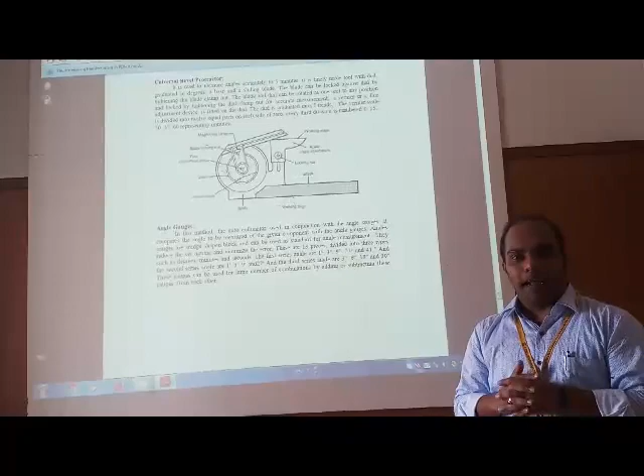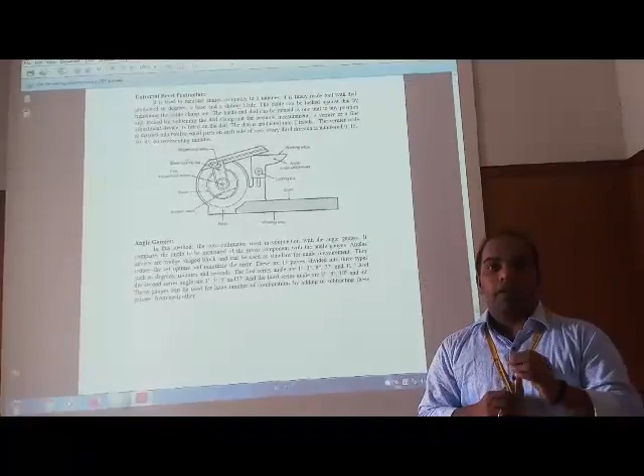In the last lecture series, we have seen videos regarding measurements using mechanical comparators, electrical comparators, as well as angular measurement using sine bar. Today we are going to do more advanced measurement using some equipment. Let us see one by one.

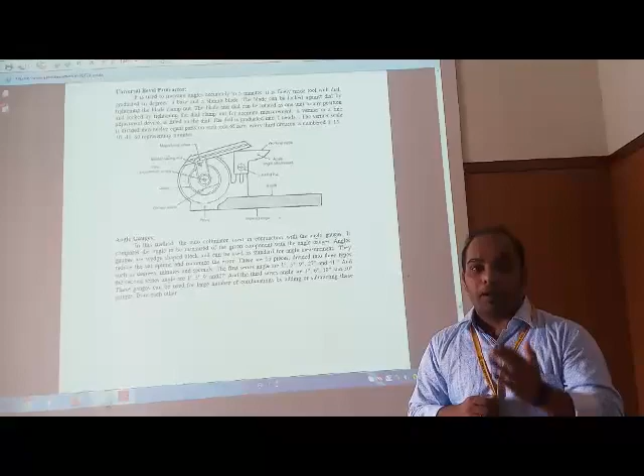The first instrument we are going to discuss is the universal bevel protractor. It has received this name because it has applications over the universe. It is used to measure angles accurately to 5 minutes. Keep in mind that minute is used in measurement as degree, minute and second.

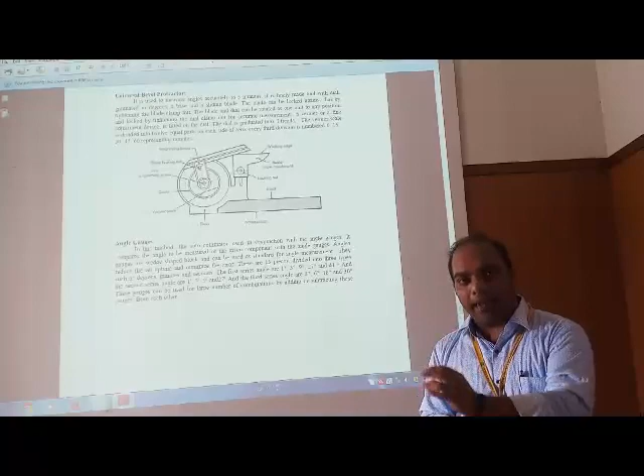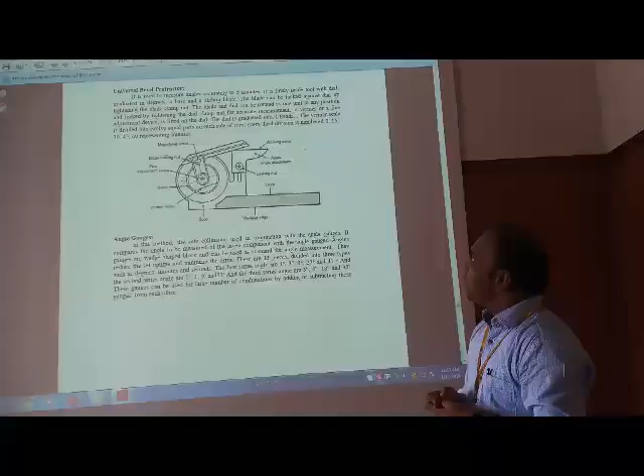It is a finely made tool with dial graduated in degree, a base and a sliding blade. The blade can be locked against the dial by tightening the blade clamp nut. The blade and dial can be rotated as one unit to any position and locked by tightening the dial clamp nut for accurate measurement. A vernier or fine adjustment device is fitted on the dial.

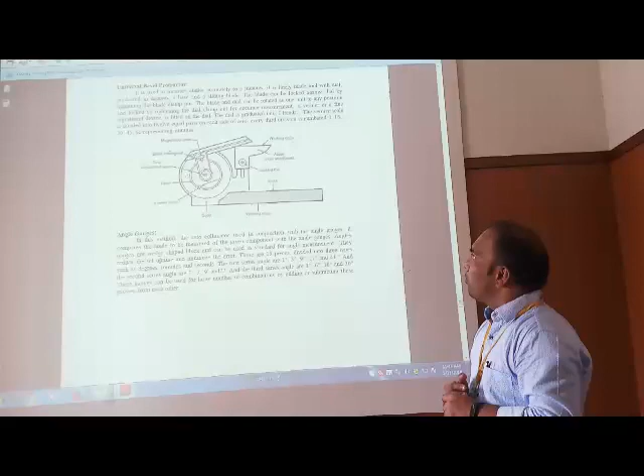The dial is graduated into degrees. The vernier scale is divided into 12 equal parts on each side of 0. Every third division is numbered 0, 15, 30, 45, 60 respectively, representing minutes. Let us see the diagram very clearly.

The working edge is on the bottom. The main body shows the connection. The vernier scale has been attached to the scale. The fine adjustment screw provides tuning of the instrument. The blade has a locking nut.

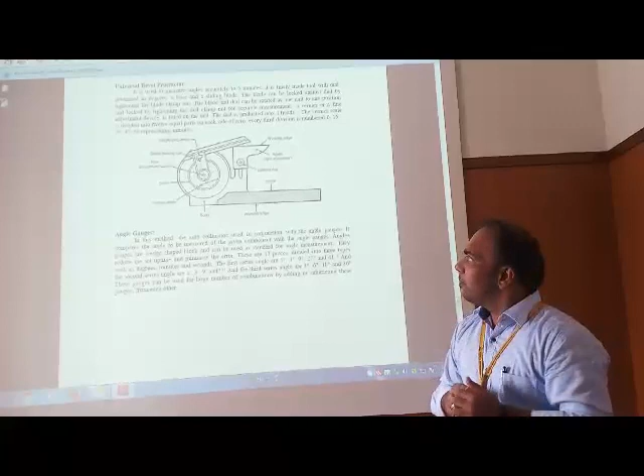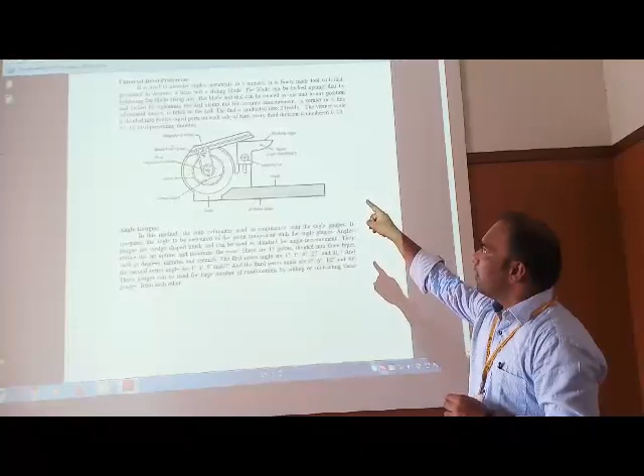The magnifying lens, as we have seen in the comparator segment, comes from the optical comparator division, but it magnifies the values, therefore reducing parallax errors. The working edge is aligned with the acute angle attachment. Also, the angular attachment is given with a nut, and the stock has been provided here. So this is, in general, the universal bevel protractor.

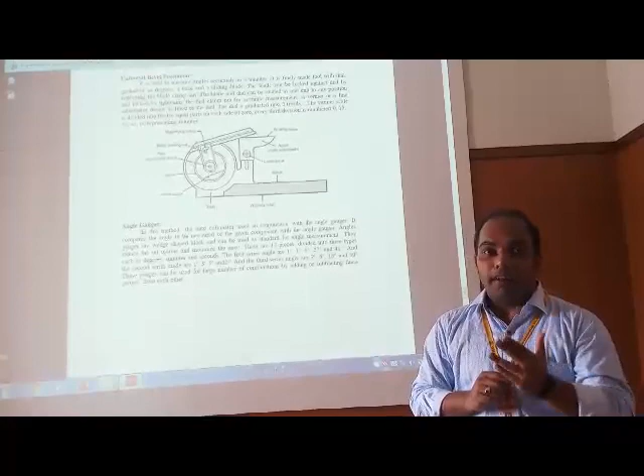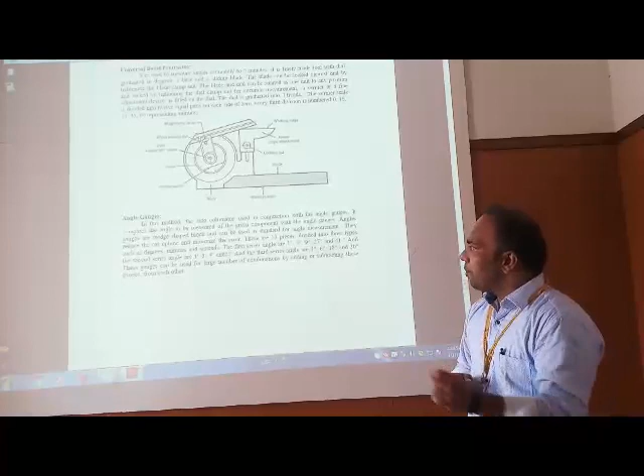Let us see another instrument in this segment, that is angle gauges. In this method, the autocollimator is used in conjunction with angle gauges. It compares the angle to be measured of a given component with angle gauges having standard angles. Angle gauges are wedge-shaped blocks and can be used as a standard for angle measurement. They reduce setup time and minimize error.

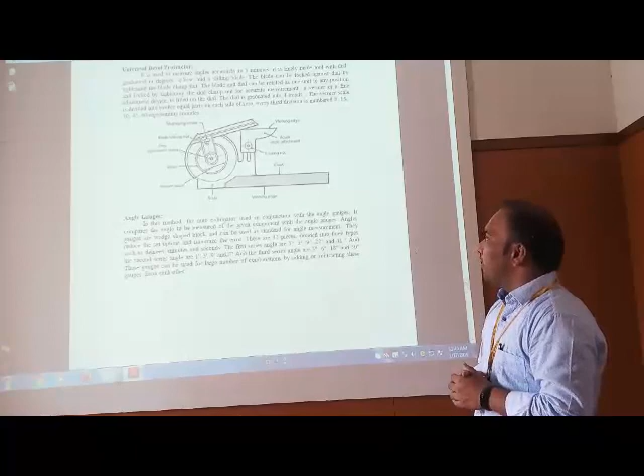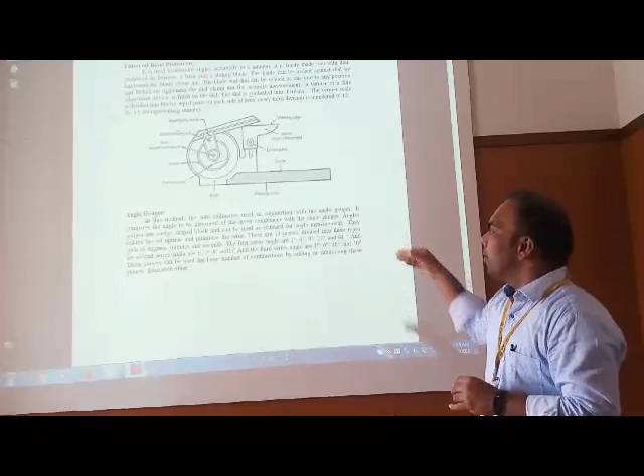These are 13 pieces divided into 3 types: degree, minute and second. The first series angles are 1 degree, 3 degree, 9 degree, 27 degree and 41 degree, and the second series angles are 1, 3, 9, 27 but in minutes. The third series angles are 3 second, 6 second, 18 second and 30 seconds. These gauges can be used for a large number of combinations by adding or subtracting different gauges.

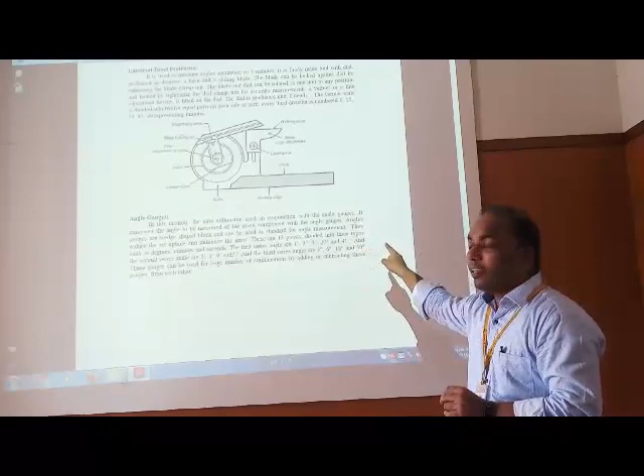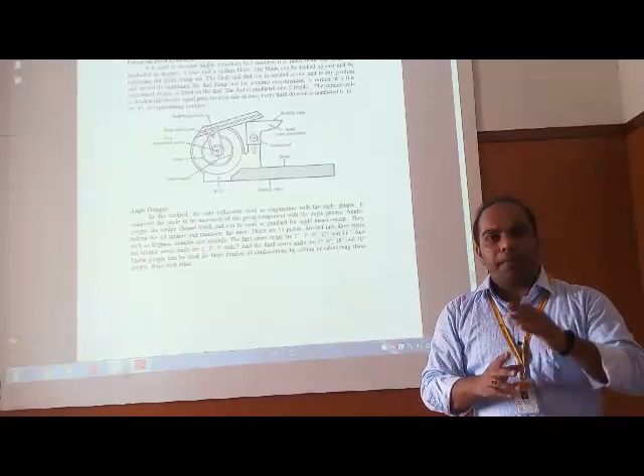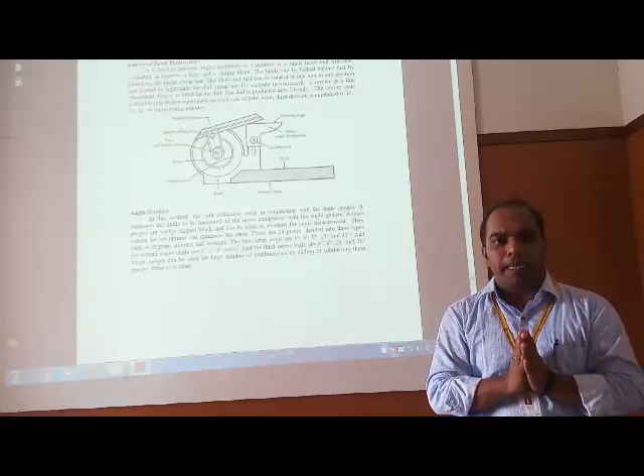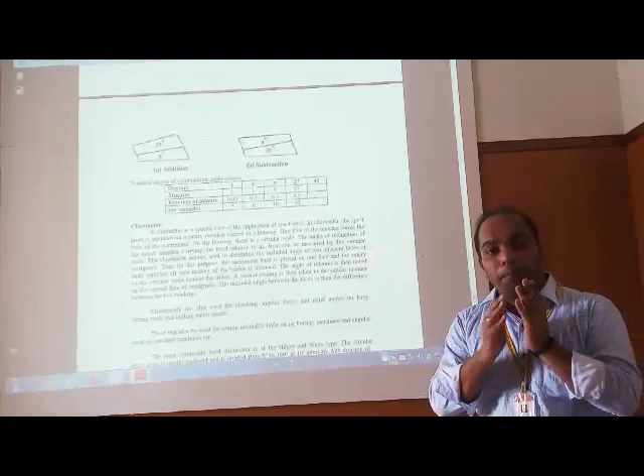As we have talked about how to form angle combinations, shown in the diagram, subtraction has been shown where 27 degree and 9 degree are in a reduction, meaning the angle included was 18 degree. In the first diagram, 27 degree plus 9 degree combine to an angle of 36 degree.

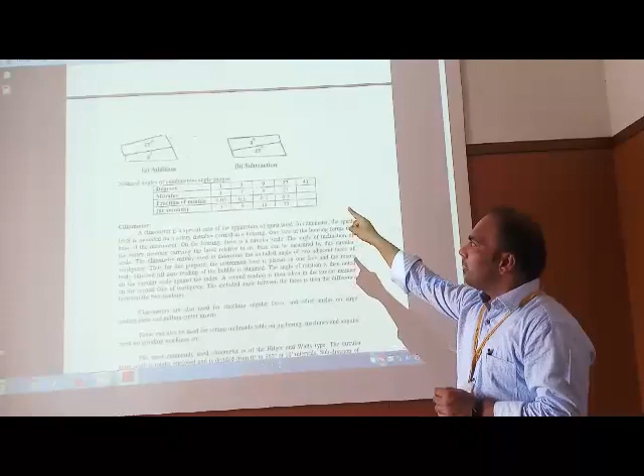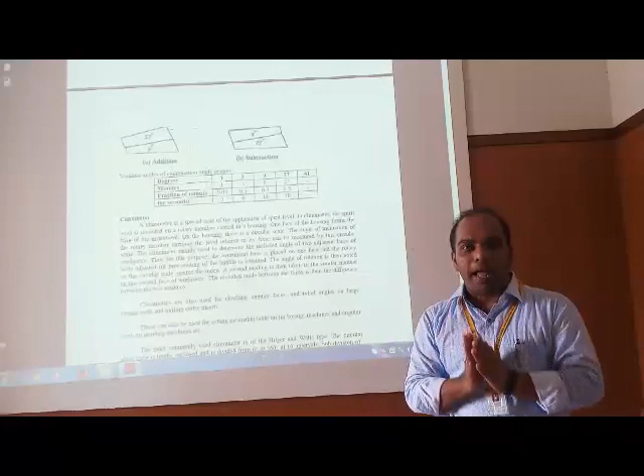Nominal angle combinations that can be obtained can be seen in the table here: degree 1, 3, 9, 27, 41; minutes 1, 3, 9, 27; fraction of minutes, or converted seconds, are 0.05, 0.1, 0.3, 0.5. So by adding different combinations in a crisscross manner, we can form different angular combinations.

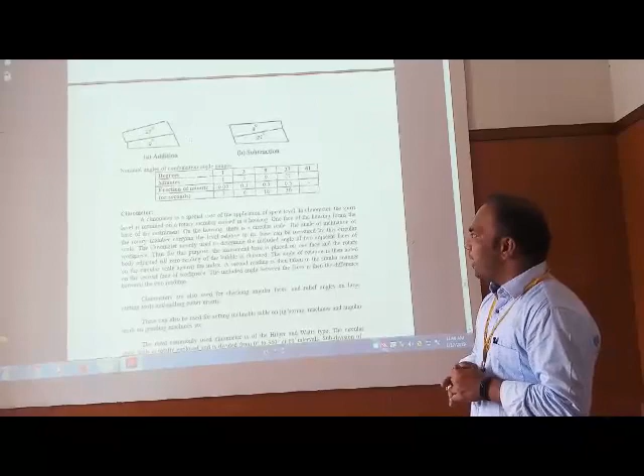Moving to the next very interesting instrument in the angular measurement segment, that is the clinometer. A clinometer is a special case of application of the spirit level. In a clinometer, the spirit level is mounted on a rotary member carried in a housing. One face of the housing forms the base of the instrument. On the housing there is a circular scale. The angle of inclination of the rotary member carrying the level, relative to its base, can be measured by this circular scale.

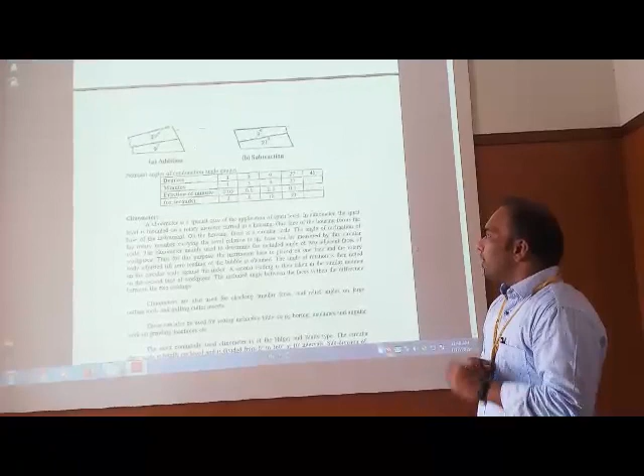Of course, all these things we are going to see in a diagram. For this purpose, the instrument base is placed, and a second reading is then taken in a similar manner on the second face of the workpiece. The included angle between the faces is then the difference of the two readings.

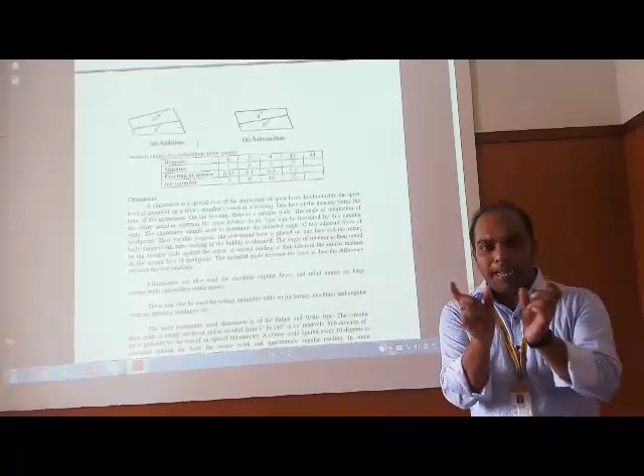Clinometers are also used for checking angular faces and relief angles on large cutting tools and milling cutter inserts. Milling cutter inserts are placed between arbors, giving angle to the milling tool. This can be used for setting inclinable tables on jig boring, as discussed last semester in the module on design of jigs and fixtures, machines, and angular work on grinding machines.

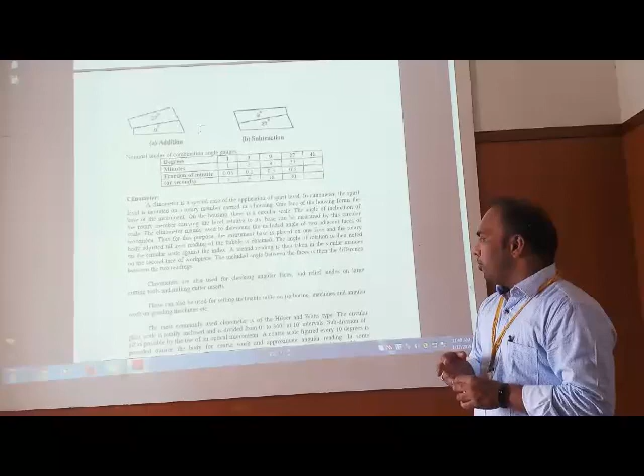The most commonly used clinometer is of the Hilger and Watts type. It is divided into 0 to 360 degrees at 10 minute intervals. Subdivision of 10 minutes is possible by use of an optical micrometer.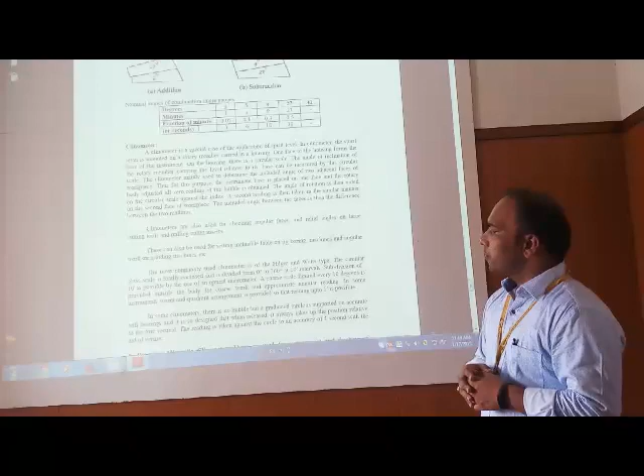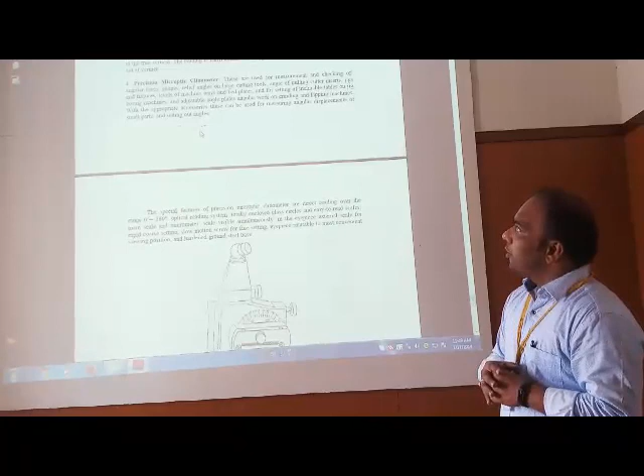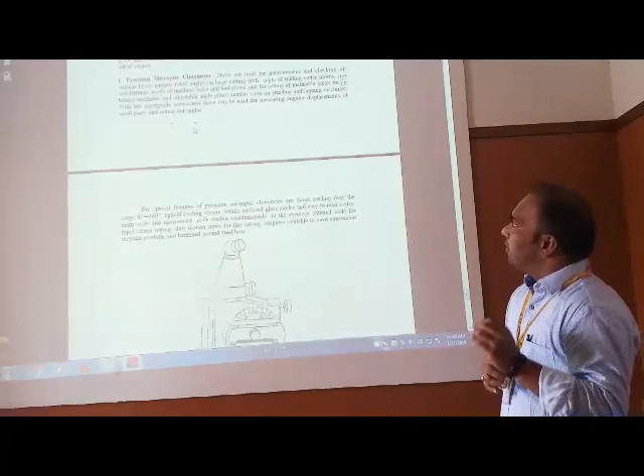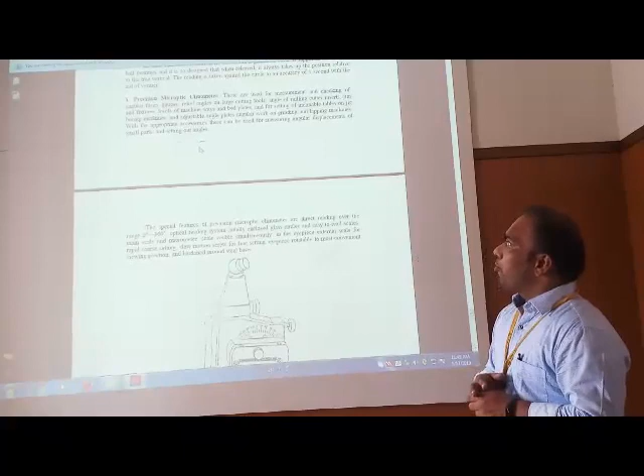Now, the precision microptic clinometer. These are used for measurement and checking of angular faces, gauges, relief angles on large cutting tools, angles of milling cutter inserts, jigs and fixtures, level of machine ways and bed plates, and for setting up inclinable tables on jig boring machines. With appropriate accessories, these can be used for measuring angular displacements of small parts and setting out of angles.

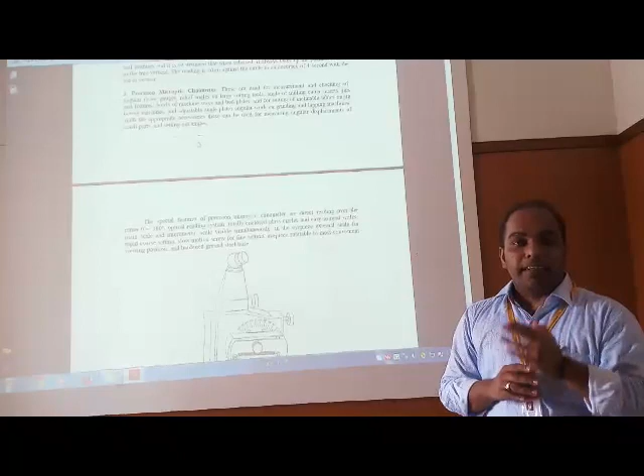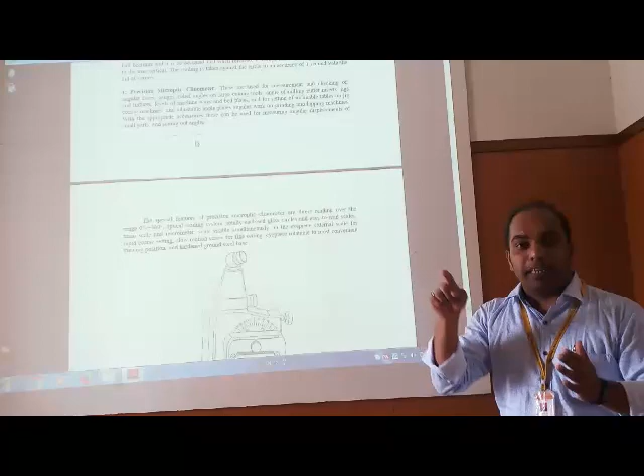If we think about it, these clinometers provide us the smallest possible angles to largest possible angles. Already in the last angular measurement, we have seen that 360 degrees is divided into 10 subintervals, meaning every part covers approximately 36 degrees.

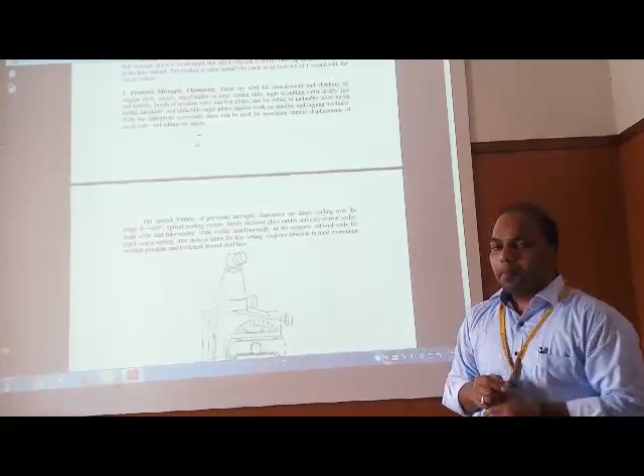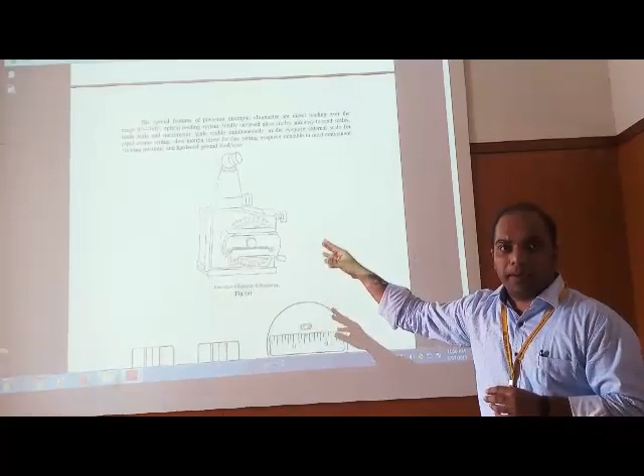The special features of the precision microptic clinometer: you can see the wonderful instrument in the diagram very clearly. As the diagram explains, the scale is divided into 10 interval parts of 36 degrees each. Therefore, 36 into 10 gives you 360 degrees in all.

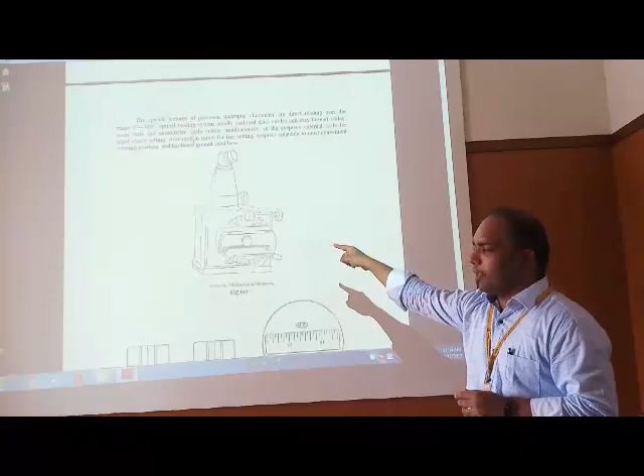There is an eyepiece for looking into that. On the right corner, the locking nuts have been provided. Of course, a slot is provided for any minor adjustment.

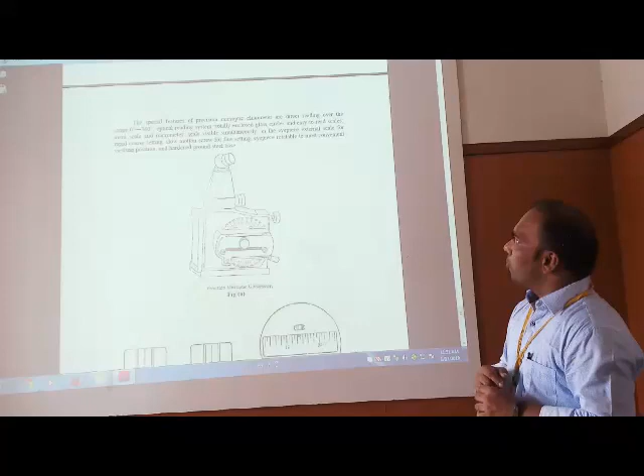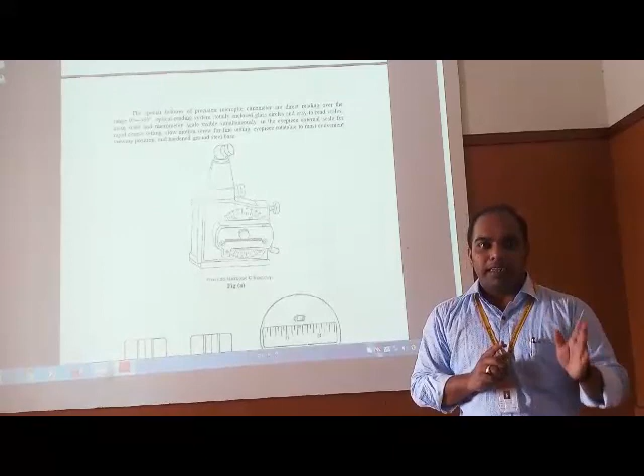The special features of this clinometer are direct reading over the range of 0 to 360 degrees, an optical reading system totally enclosed in glass circles, and easy to read scales. This means we can minimize the parallax error which generally occurs due to uneven looking into the scale.

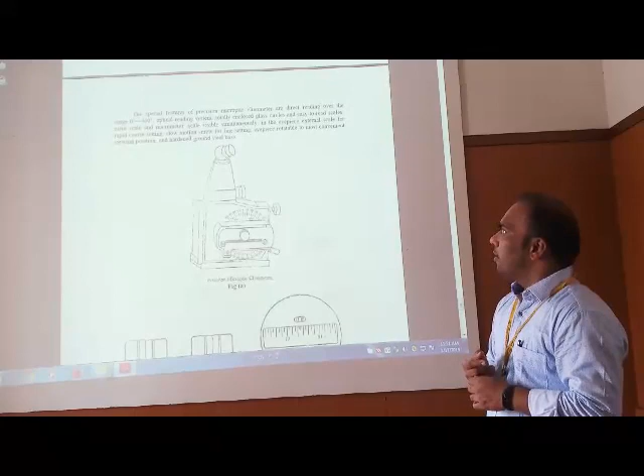The main scale and micrometer scale are visible simultaneously in the eyepiece. External scale for rapid coarse setting, slow motion screw for fine setting, eyepiece rotatable to the most convenient viewing position, and a hardened ground steel base are some of the added features of this wonderful clinometer.

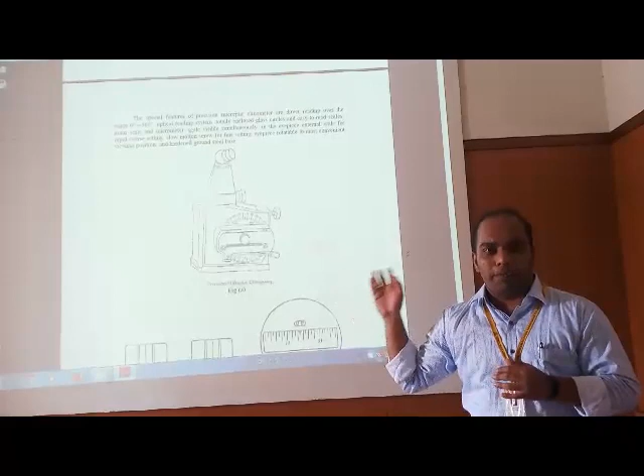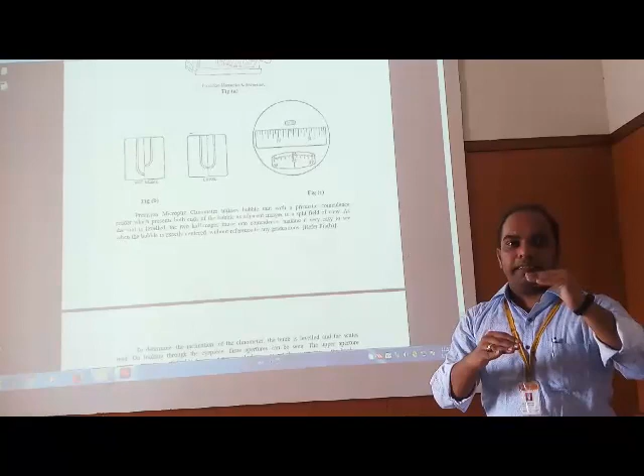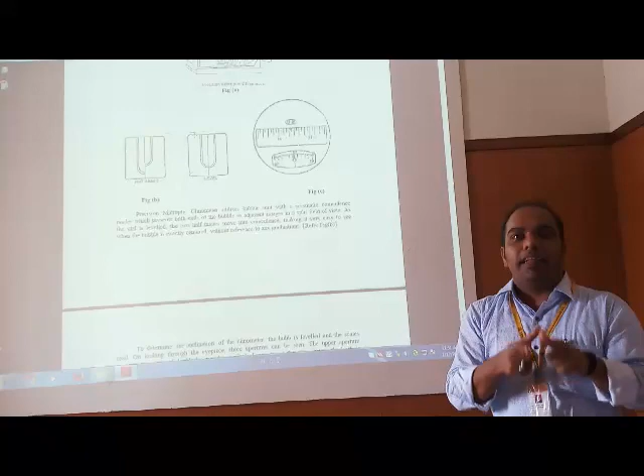We can check out the levels obtained in the two surfaces, that is, the surface compared and the actual workpiece. First, the surfaces are not matching, that is, it is not level. Second, it is perfectly coinciding, meaning the level has been achieved, and it can be visible on the master scale.

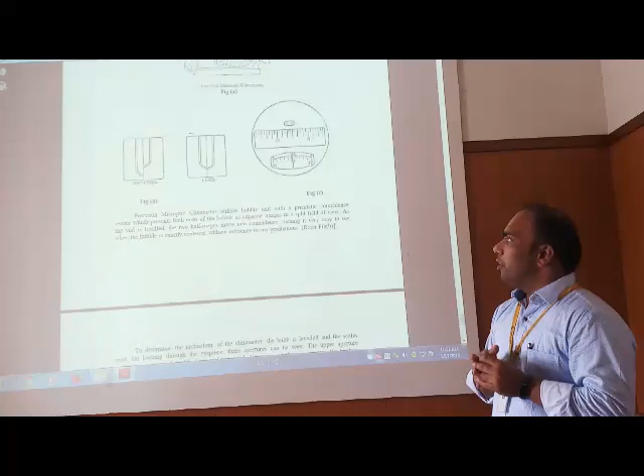The precision micro-optic clinometer utilizes a bubble unit with a prismatic coincidence mirror which presents both ends of the bubble as adjacent images. As the vial is leveled, the two half edges move into coincidence, making it very easy to see when the bubble is exactly centered without reference to any graduations.

Now, the summary of the clinometer. Without wasting much time, we will look at the summary.

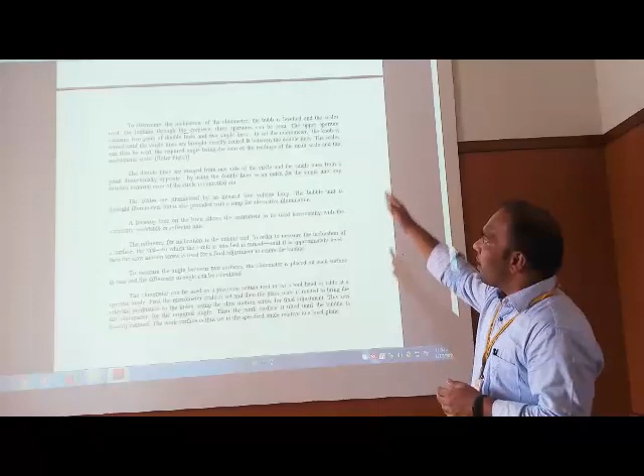To determine the inclination of the clinometer, the bubble is leveled and scales are read. The double lines are imaged for one side of the circle and single ones from the point diametrically opposite, using the double lines as an index.

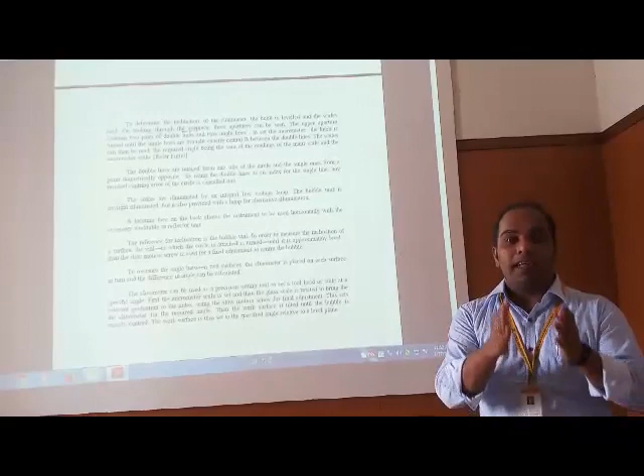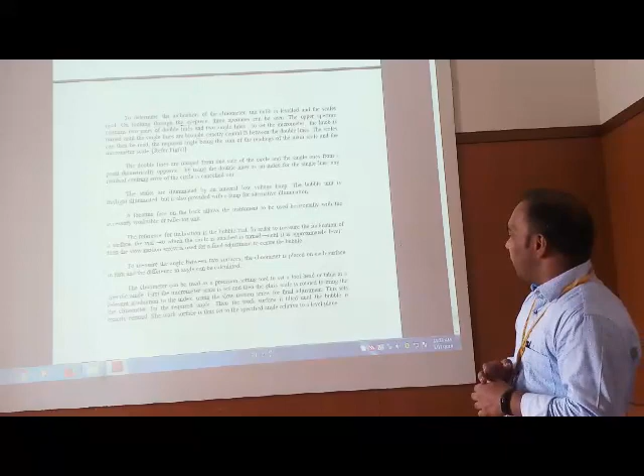The locating face on the back allows the instrument to be used horizontally with the accessory workable or reflector in it. The clinometer can be used as a precision setting tool to set a tool head or table at a specific angle. First, the micrometer scale is set, then the work surface is tilted until the bubble is exactly centered. The work surface is thus set to a specific angle relative to the level plane.

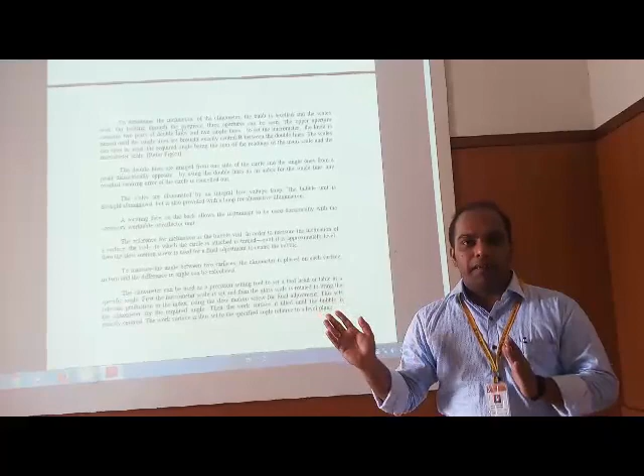Dear friends, we have gone through the theory part of the clinometer. In the practical examination, we will be using this information to calculate different angles included here. Thank you.